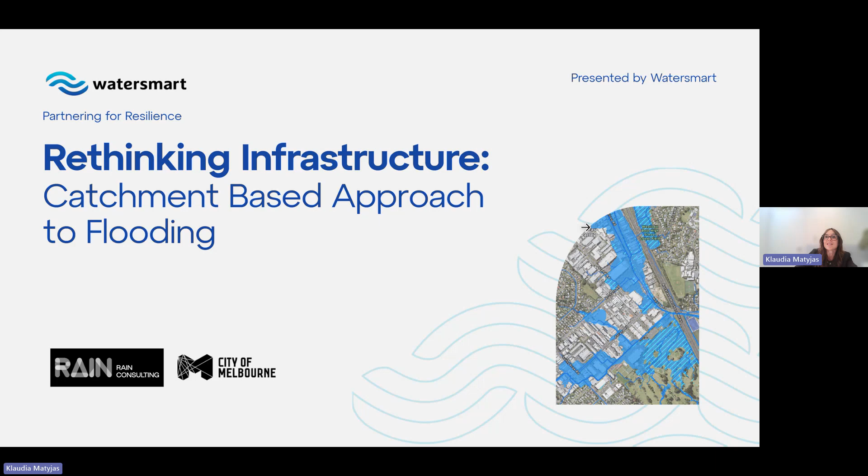Considering that you're here today, I suspect most of you know a little bit about Watersmart. I'll do a really brief introduction about who we are and what drives us. Our mission is simple: we want to optimize our water footprint on this earth. We do this by helping communities manage, treat, measure, and protect their water systems, creating healthier, safer, and more sustainable environments.

Among other systems, Watersmart delivers tailored stormwater management and flood protection strategies here in Aotearoa, New Zealand.

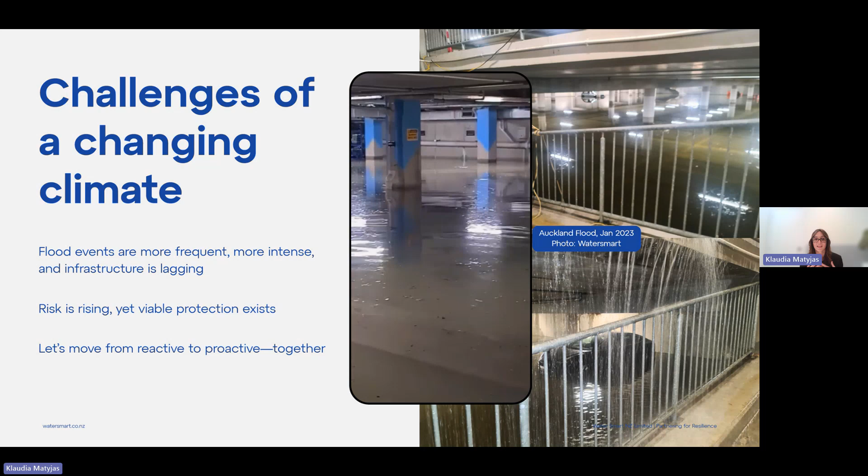Floods are no longer a rare event. They're more frequent, more intense, and increasingly destructive. It's clear that our infrastructure here in New Zealand wasn't built for this reality, but that doesn't mean we cannot adapt and change something.

The irony of a 1 in 100-year flood is that it's much more frequent now than 1 in 100 years. I think in my 6 years living in Auckland, I must have experienced at least 2 of those events. So that tells you a lot.

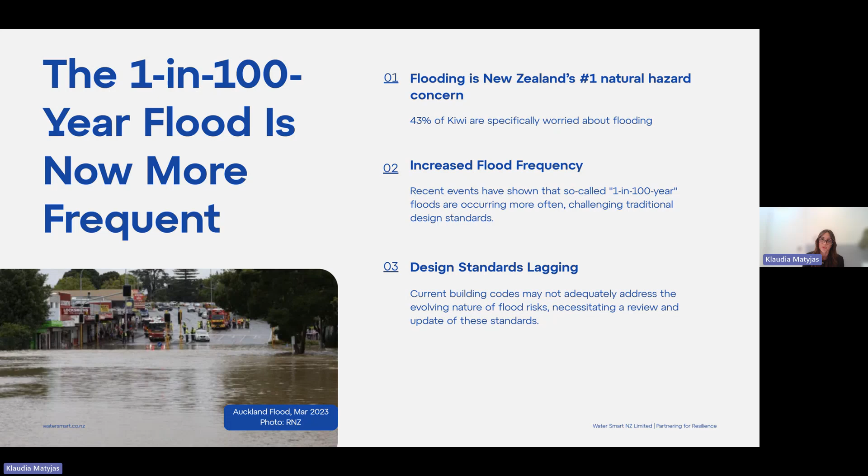Flooding is actually a major concern to New Zealanders, with 43% of us specifically worried about flooding. Our design standards are lagging, and they're in need of urgent review to reduce the risk to lives, to property, and to our communities. But fortunately, there is also a big economic benefit to that.

Research shows that every $1 invested in flood risk reduction can save us up to $4 in future response costs. And that's the conservative figure, because in some cases, this number is as high as $12 to $1 invested. So it's a real incentive to act sooner rather than later.

So what are the infrastructure implications? Our aging systems are clearly struggling, and we're already doing a lot in the sector. Councils face a lot of work, however also long-term lead times on some of these major upgrades, like the Wairau Road catchment here in Auckland. We need some solutions that bridge that gap.

So temporary, more private protection today that complements the more longer-term catchment-wide approach for resilience tomorrow.

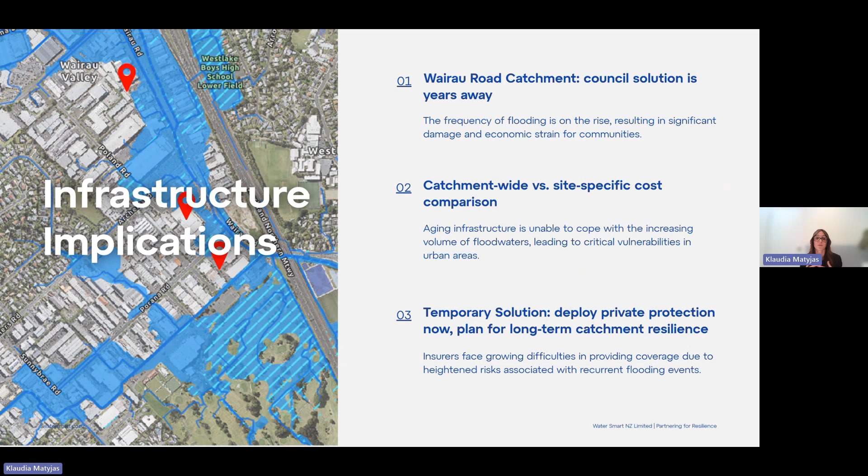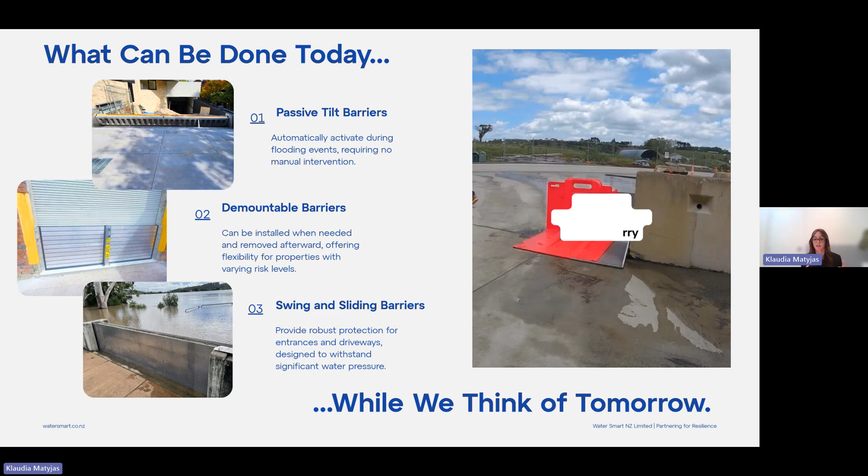At Watersmart, we can help with both. My colleagues today help councils and private asset owners by implementing a range of flood barrier solutions into their flood protection plans for now. If this is something you need in an interim, you can get in touch with us today and we'll be more than happy to help.

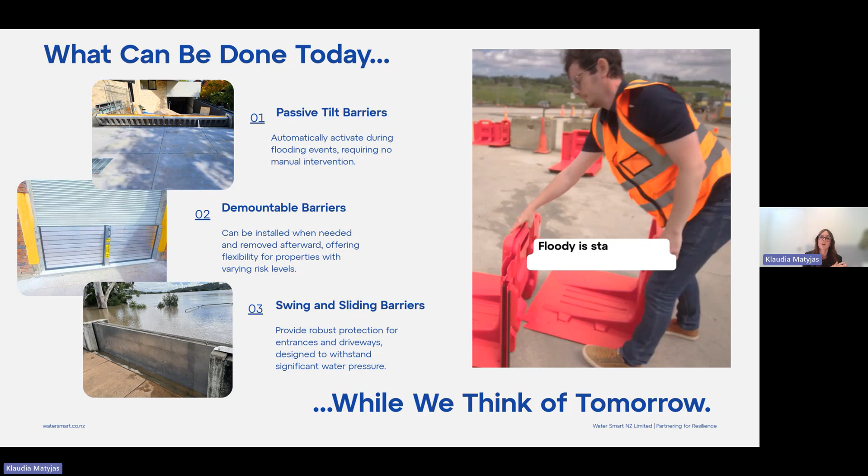But on the other side of the business, we are working with civil engineering experts on implementing the bigger picture solutions. And today we'll be discussing these strategies of longer term resilience and the catchment-based approach to flooding.

So without further ado, I'd like to introduce our guest speakers today. They'll present a real-world case study and their findings on the subject of catchment-based approach to flooding, from across the Tasman from the city of Melbourne. From the city of Melbourne, we have Dr. Cintia Dotto, who's the water-sensitive city lead. Cintia has 15 years experience in the sector and is interested in innovative solutions for climate-resilient cities.

And from Rain Consulting, we have Luke Cunningham. He's the director and the principal engineer. Rain Consulting have been awarded the 2024 Stormwater Australia Award for creating a series of training courses for Australian councils on how they can improve stormwater management across major urban centres. Luke's actually joined our call today from Perth, so thank you for your commitment to joining at such an early hour of the morning.

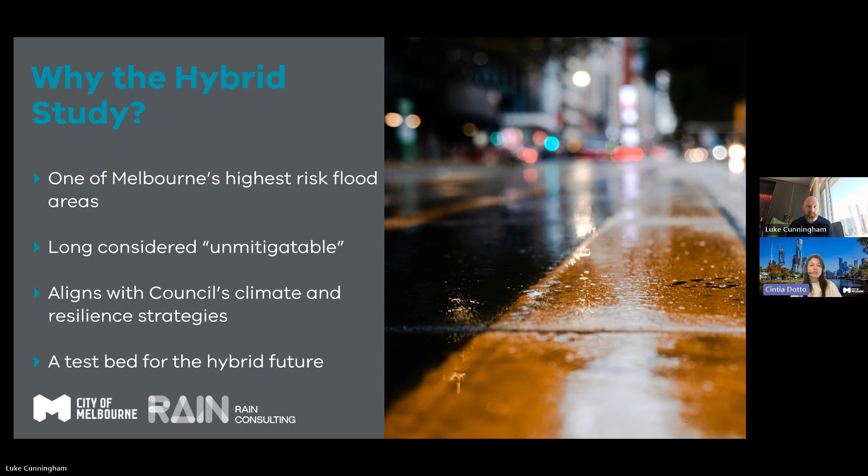This obviously aligns with our city's climate strategies and integrated water management plan. We really see that we have a role to play in how we better manage urban catchments, and this work fits with our vision. It's also been a great opportunity to test our thinking - that a hybrid solution, a mix of traditional infrastructure, nature-based solutions, and increased permeability, can help reduce flood risk in urban areas. This is specifically what we did for this catchment, and we're now looking to expand the principles to other catchments.

A little bit of context on the City of Melbourne and where the Elizabeth Street catchment sits: the City of Melbourne has about 200,000 residents, but almost 1 million people come and pass through the city every day, for work, tourism, cultural activities, and many other reasons.

So it is a very busy city. And the Elizabeth Street catchment, if Luke points to the main drain where it is, that's really one of the key urban spines of the city, where you find a lot of commercial and people activities. This is basically the CBD where everything happens.

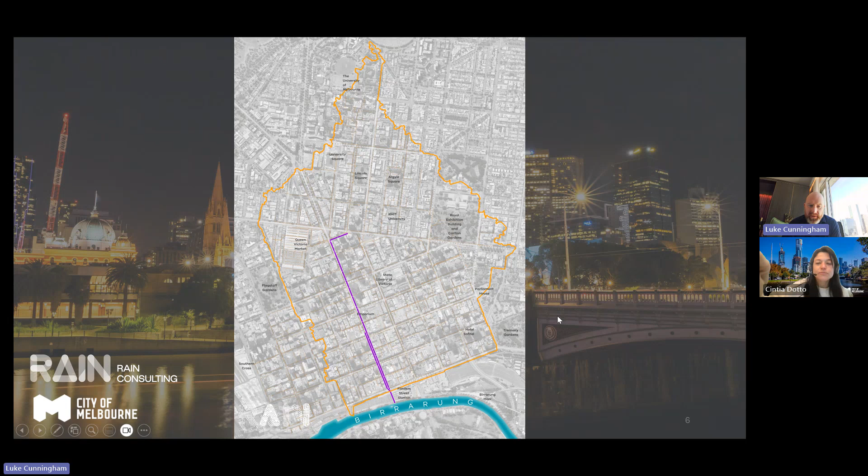I'm going to go into a little bit more detail about what this study entailed and how we looked at it. We call it the catchment-based approach to dealing with flooding. It sounds like a fancy name, but what we're talking about is it's truly a catchment-based approach. So when we've got an issue, say on Elizabeth Street, which is this main spine here, sometimes as flood modelers or flood practitioners, we're tempted to just go straight into the area of issue and try to solve it there. And a lot of the time that can be a big pipe running down the road, or a storage or something like that.

In this case, as Cintia mentioned, it's a heavily constrained catchment. We've got lots and lots of services underground. We've already got two big pipes running down Elizabeth Street, things like that. So what we've called this is the catchment-based approach, to really understand how the catchment works, what the timings are throughout the catchment, and whether we can impact that in a different way, rather than trying to solve the issues on Elizabeth Street and other high-risk areas by doing works elsewhere in the catchment.

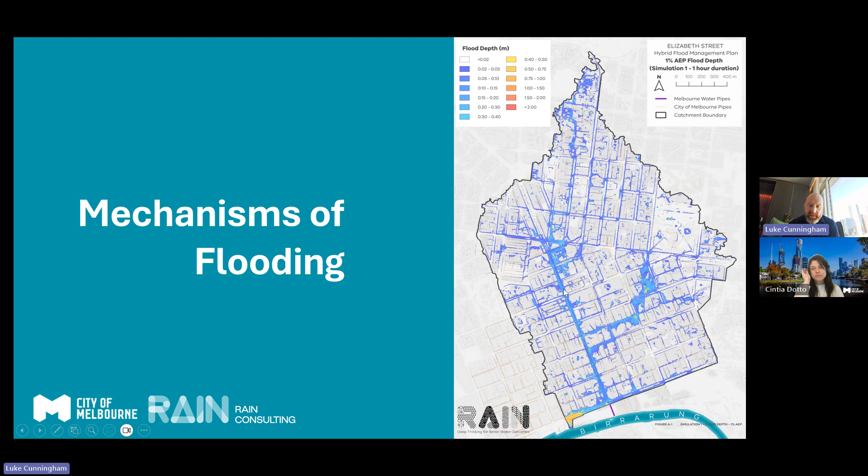What really gets us in this catchment is the velocity of the water running through the streets. So quick little bit of history.

It was described, when talking about Williams Creek, as a jungly chasm, an irregular broken up ravine through which the winter flood waters thundered over shattered tree trunks, dispersed rocks, roots and nuts. That's in 1888, before we'd really developed the catchment to the level it is today, and it was already talking about a very, very wild catchment.

What they did around that time was they covered Elizabeth Street right up, covered the creek up, and built two big brick barrel oval drains running down Elizabeth Street. And this Edmund person, back in 1888, said Melbourne missed a great chance in filling up a street this troublesome - referring to that we could have left it open as a waterway at the time and helped deal with the problem.

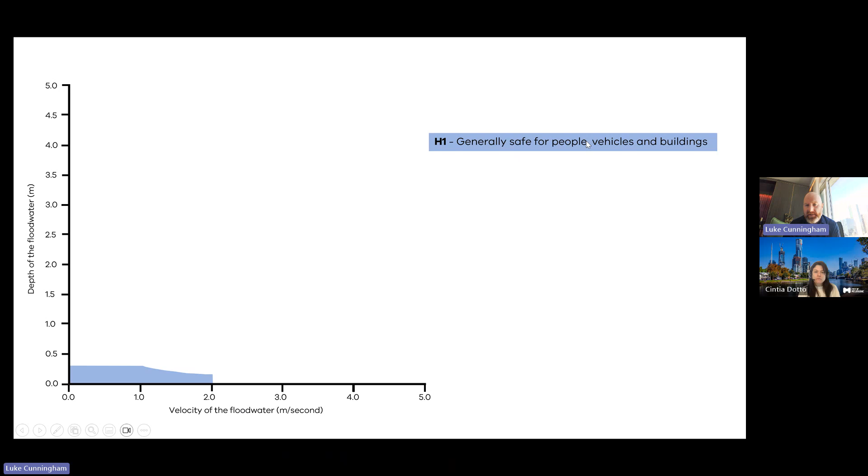H1 is generally safe for people, vehicles and buildings. You can see as it builds up, when we're in this yellow category, we're looking at unsafe for vehicles and people. Buildings are vulnerable to structural damage, so we might start damaging buildings, and older, less robust buildings might actually fail completely. We're talking about velocities up to 4 meters a second there, depths up to 4 meters.

We said that on that 1972 event we had 6.2 meters a second, so we're off the scales on the national hazard categories here. Unsafe for vehicles and people, all building types considered vulnerable to failure. So this is what defines this risk in Melbourne.

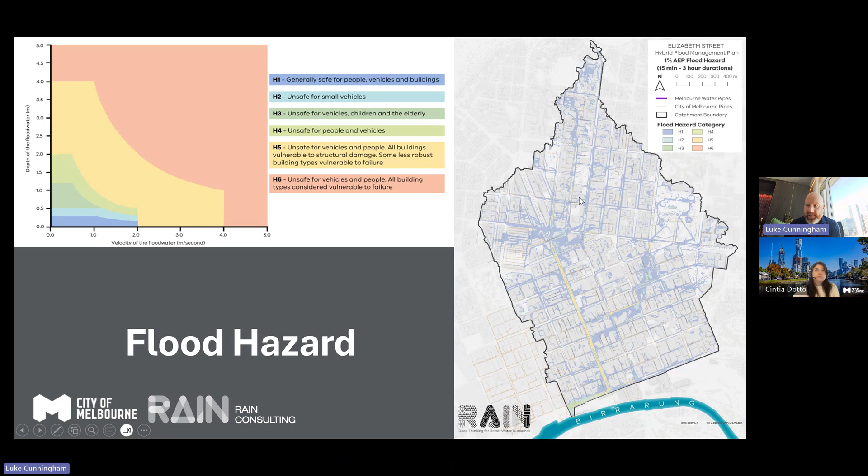I'll go back a slide there, if I can work that out. Okay, so we're going to have a quick look at the velocities, the hazards across the catchment. This again is the 100-year event, and you can see the hazard categories coloured the same on the map as they are on the chart. We'll do a bit of zooming in.

So this is off to the east side of the catchment. We've got the Carlton Gardens up the top here and the Melbourne Museum. As soon as it leaves there, we've got some H5 hazard immediately rolling through as the water makes its way, wobbling through these streets, through buildings, particularly through here. We've got this very, very nice big area of H5 hazard.

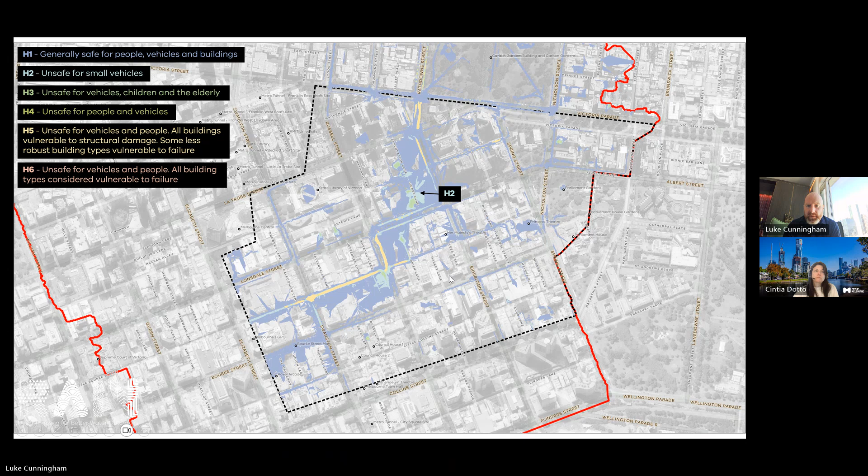This is our Chinatown area of Melbourne. Very, very busy area, very confined streets, very old buildings as well. So when we're talking about old buildings, we can also be thinking about the potential for failure there. Just pointing out some of the hazard categories there.

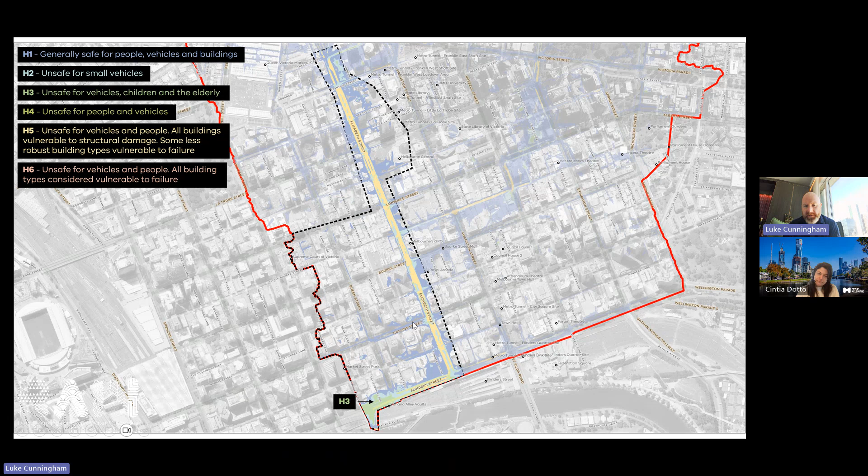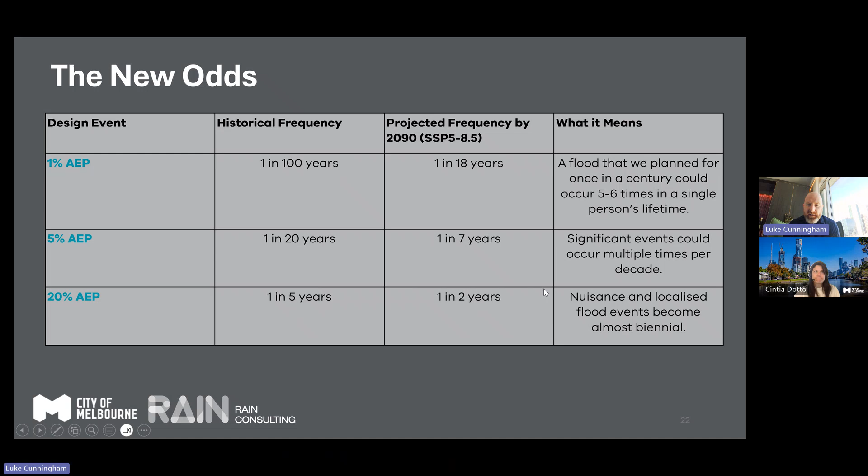Not only do we have this existing flood history, we've now got further development in the catchment, and we've also got climate change coming for us. So what was our 1 in 100 year event - as Claudia mentioned earlier, she's seen a couple in 6 years - with our climate projections, we're looking at a 1 in 18 year storm. So if you plan to see one in your lifetime, you're probably going to see 5 or 6 with the new odds. And these more frequent events are going to become even more frequent.

In the upper catchment, flood storage is a good idea - that's where you capture it and release it slowly. Stormwater reuse is a great idea too - we catch it but don't let it go, we reuse it later. Hard surface reduction, of course, and treating the hazard locally, so that's just localized solutions.

We'll go into that a little bit further.

But catchment wide, we've also got policy levers we can use, and some flood education and resilience and flood warning systems. So what did we do?

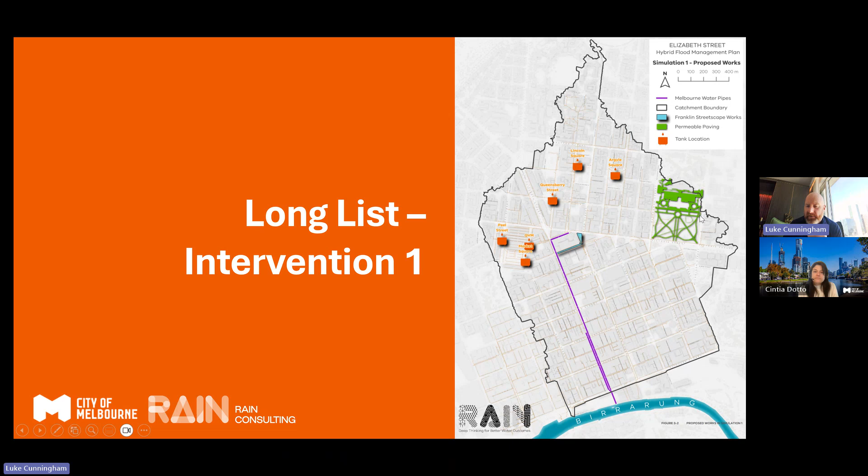We came up with 3 lists of different mitigation solutions we could look at. This wasn't just arbitrary, there was a lot of background that went into this. The first one is looking at some big storage tanks in the upper catchment, some streetscape works in the blue, and some permeable paving around the Carlton Gardens and the Melbourne Museum. I'll go a bit more into that permeable paving in a minute.

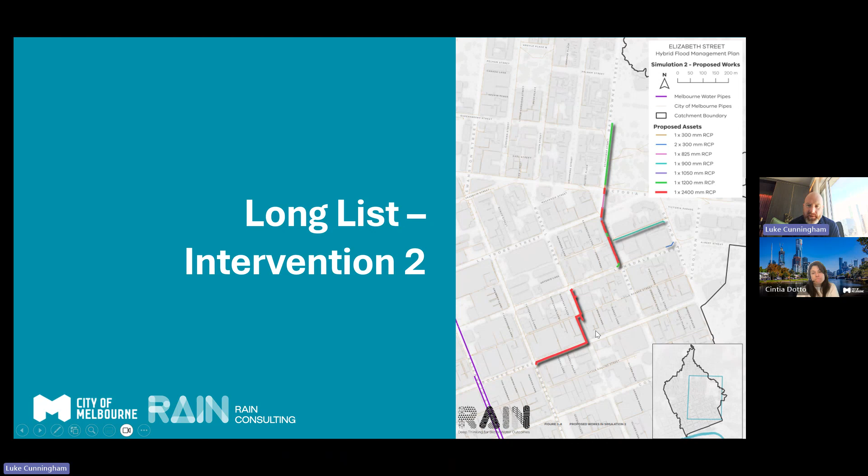Number 2 was a really traditional engineering approach where we put in big pipes, essentially. Particularly this one here, Russell Street and Bourke Street, our main shopping precinct. We designed this, it worked quite well. It was a 2.4 metre diameter pipe, but it would be incredibly disruptive to build something like this. We'd have to completely rip up both of these roads, probably a couple of years to construct, incredibly disruptive to the city, put a big pipe in, bury it underground, and hope for the best next time it rains. Number 3 was bike lanes considered for permeable paving.

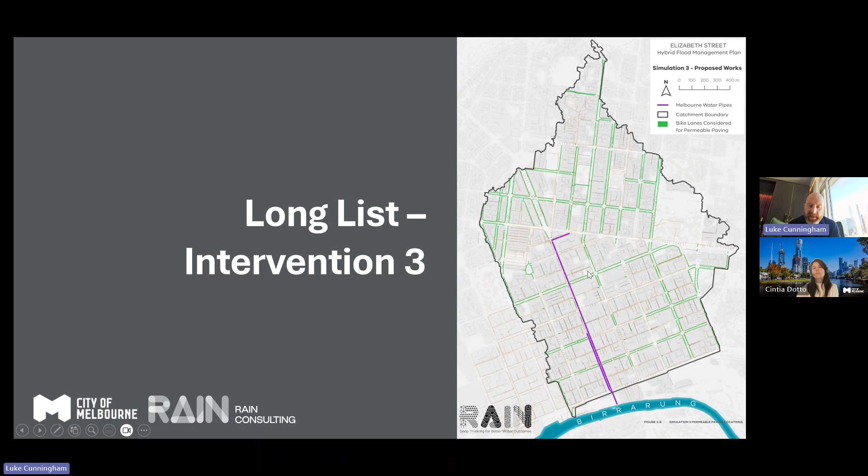That's where the porous lane type product came in. On this map, in the green, these are all the bike lanes we considered for permeable paving. The more and more we use our bike lanes, or redo them, we keep them separate from traffic, which is a great benefit for the porous lane products, or any porous paving product, because we want to keep big vehicle movements off them. We saw that as a really nice opportunity.

So this is our solution at the moment, or how we've modelled it. You've got your bike lane on top, and our permeable layer in the dotted colour. Instead of relying on infiltration to the groundwater, because we've got a lot of rock in the city and contaminated soils, what we did is put a 400mm high box culvert for the width of the bike lane. That creates storage, so once that storage is full, the bike lane just cannot absorb any more. We've also connected it to the council's stormwater network, so it almost works like a little retarding basin everywhere.

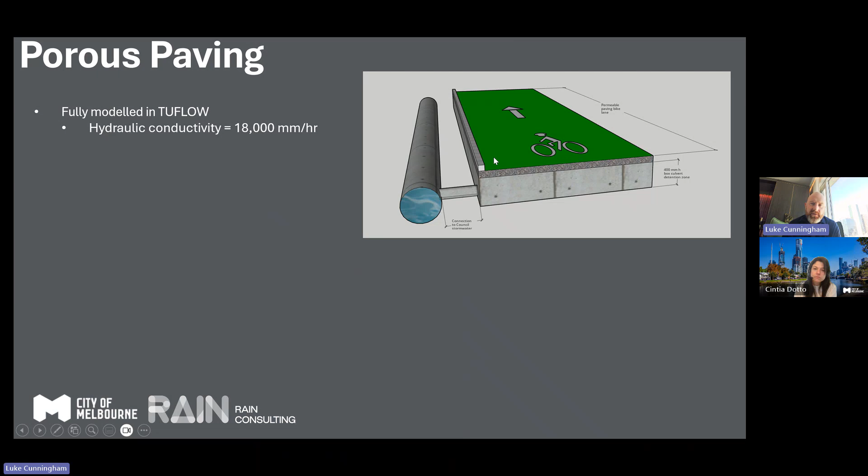We've fully modelled this in TUFLOW, the flood model we're using. As far as we're aware, we're not aware of anyone doing permeable paving in a flood model to this degree over this size of catchment before, so we're quite proud of this work. These are some of the parameters given to us by Porous Lane, and we'll note this one here, the 18,000mm an hour infiltration rate, or hydraulic conductivity.

So what we did was model it with that 18,000 an hour, which is quite a lot of infiltration. One of the negative points about porous paving is that they can block and need a lot of maintenance. So we modelled it with 180 millimetres an hour, 1% of its capacity, and also at 39.2, somewhere between our 100-year and 50-year event. What we found was the results were actually unaffected by the infiltration rate until the rate dropped below that storm's intensity. When we modelled the 180 millimetre an hour, our 100-year rainfall intensity for the 1 hour events was somewhere around 70 millimetres an hour, so it was more than enough to still cater for that, which was a nice conclusion, that the maintenance wasn't such a big issue.

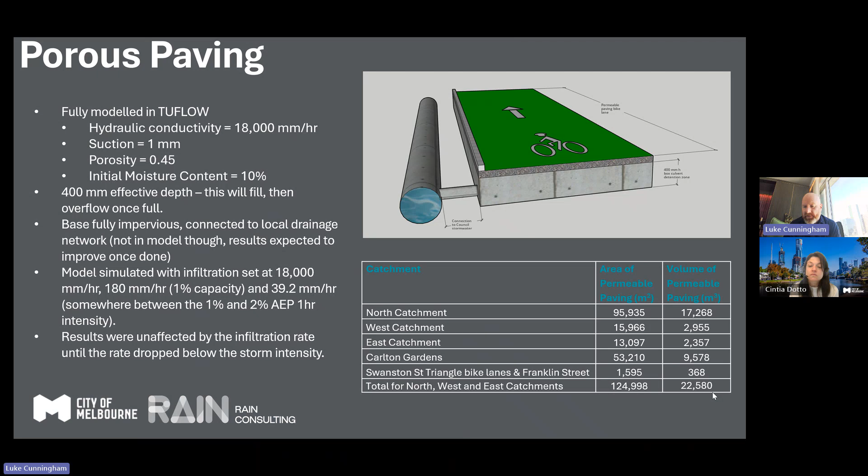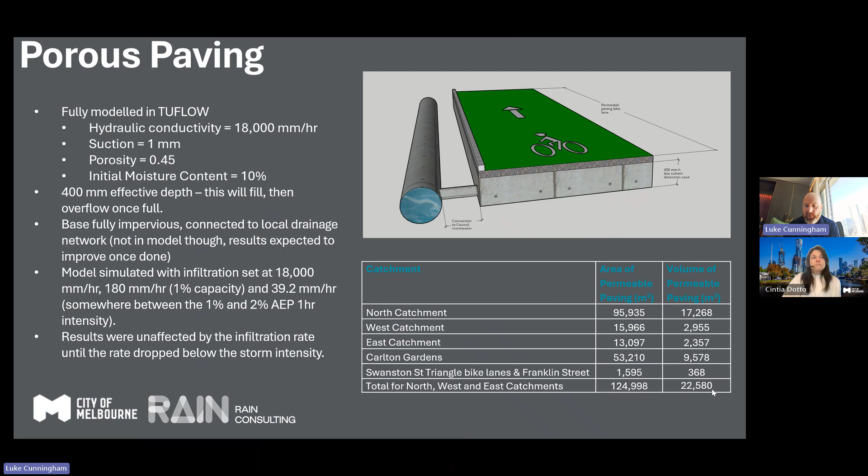On this particular one, this is what we put in, our area of permeable paving. We had just under 125,000 metres squared of bike lanes proposed to change over in the model, and that translated to 22,000 cubic metres of storage when looking at these box culverts. That's a lot of storage for us in the CBD, because it's very hard to get big storages. If you're in a more urban or rural area with parks and sporting fields, you can get a lot more storage than this, but this is also distributed across the entire catchment.

So what did we see in what we call the 1% AEP event, or the 1 in 100-year event?

We saw reductions in depths everywhere across the catchment. Here's a nice little image of what bike lanes in Melbourne look like, generally separated from the traffic lanes with some bollards or something like that.

We saw around a 5 to 15% reduction in depth, and upstream at the top end of Elizabeth Street, around a 15% reduction in depth, and downstream about 20%. Right down the bottom where it sort of ponds and waits to get out to the Yarra, we had about a 30% reduction.

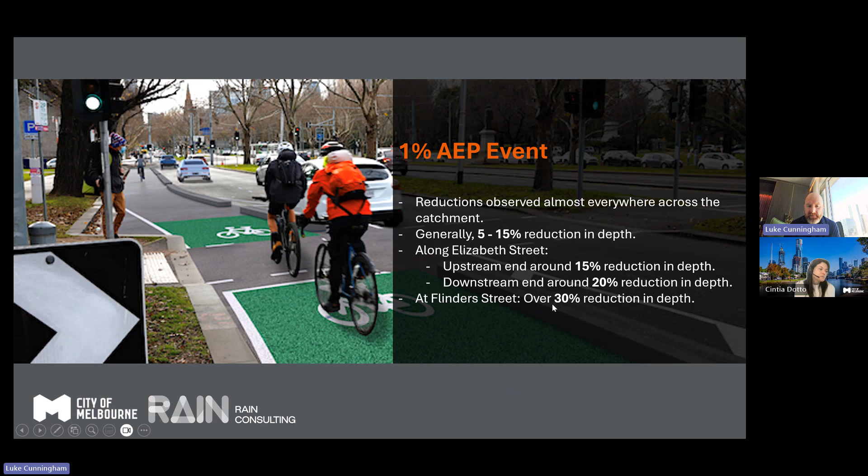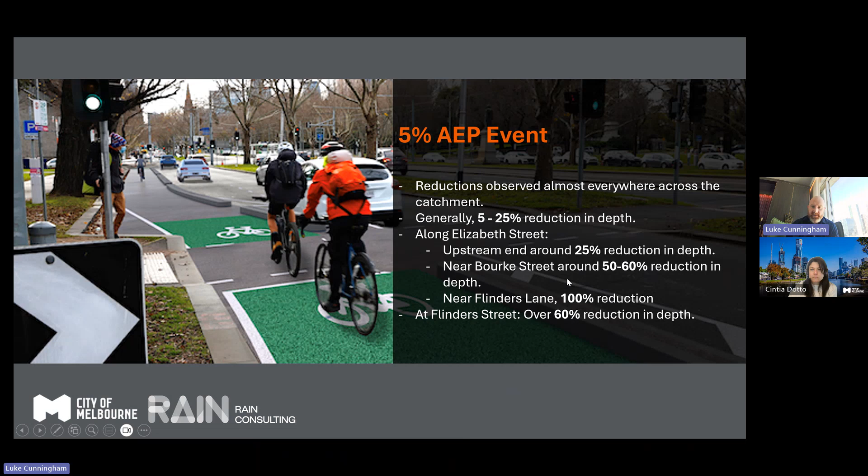In the 1 in 20-year event, or the 5%, again we saw reductions everywhere between 5 and 25%. Upstream, around 25%, but when we got down to near Bourke Street, that very busy area where most of those photos of the tumbling water down the street were, we see about a 50 to 60% reduction in depth. Near Flinders Lane, just a little bit further, not quite when it gets to Flinders Street, we saw complete drying of the catchment in that event, and over 60% when it's on Flinders Street.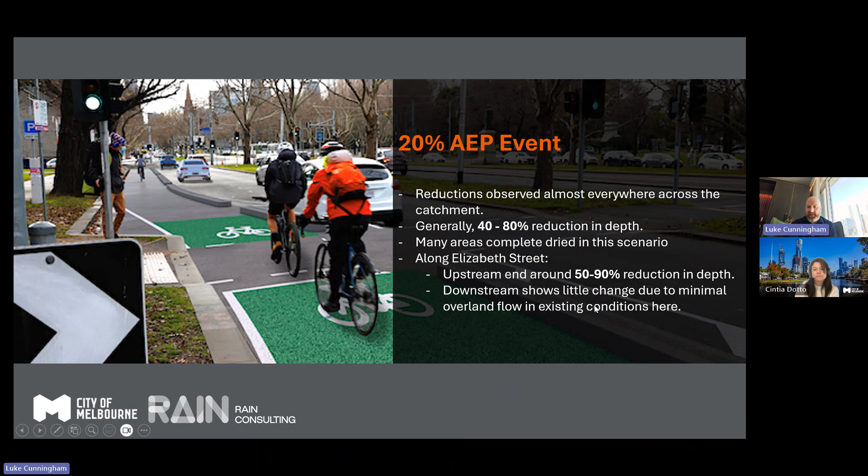So interestingly, the hazard reduction is a really nice one to talk about. Hazard reductions are common along the main flow paths. Reductions in these very high hazard areas along Elizabeth Street and the eastern CBD, that Chinatown area I showed you, were between 2 and 4 hazard categories. We actually saw large areas of H5, that's unsafe for vehicles, people and all buildings, reduced to H1, which is generally safe for people, vehicles and buildings, and that's in the 1% event.

So that's while we're talking about reductions in flood depth. That's great, but what we're really caring about here is these reductions in hazards. That's what matters to public safety.

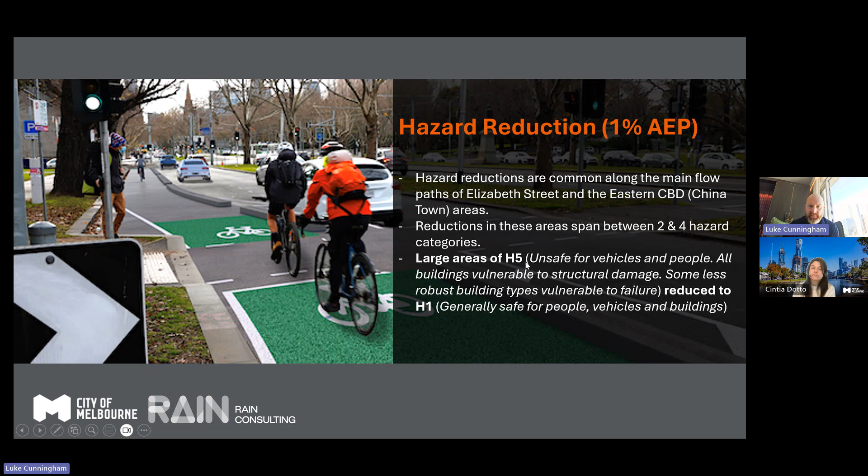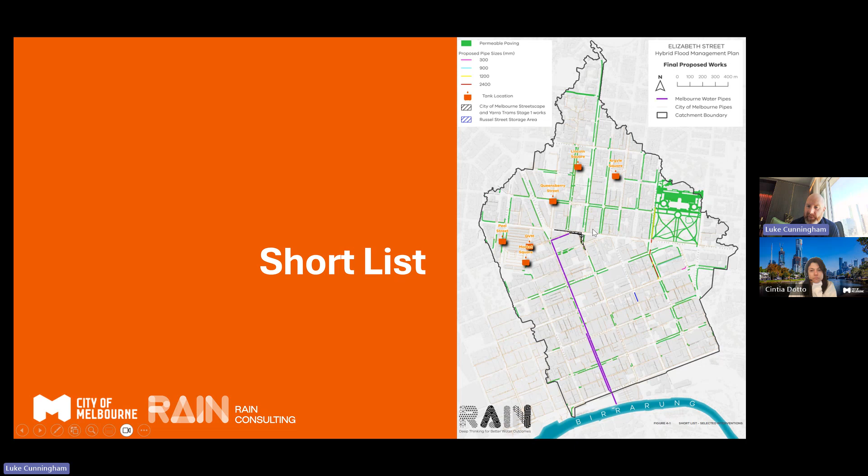Where we went from there was we came up with this short list, which was a combination of all the ideas. We've got those tanks, we've got a few of those pipes but not the big disruptive one, some streetscape works up here, and then the remaining green is where we put the permeable paving. How did we decide where to put that permeable paving? The model actually tells us how well those areas perform, how much infiltrates in those areas, so we targeted the best performing areas there.

So in this one, we've got some flood depth reductions. I'll quickly zoom in - this is the 1%... I think it's the 1%, sorry, no, 20%, so the 1 in 5 year. We've got some pretty big reductions, almost 95 to 100% through here, and up the top end of Elizabeth Street, some very, very big reductions as well.

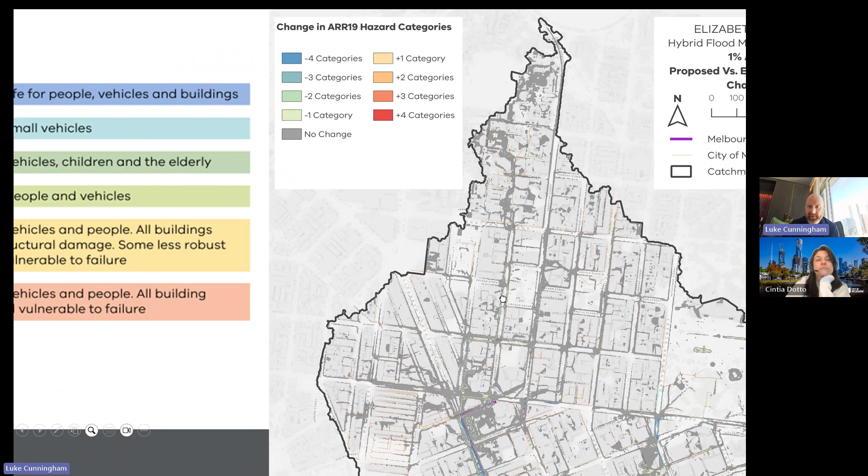That's in flood depth. And then when we look at hazard, this is the 1% event, the 100-year event, we can see some big reductions. These are just changes in hazard categories. Blues and dark greens are -4 or -3 categories, so if we're going from H5 to H1 that would be -4 categories. We can see some really nice spots through there - it's a bit hard to see, but spottiness all up Elizabeth Street of between 4 and 3 category hazard drops. So some very impressive results there.

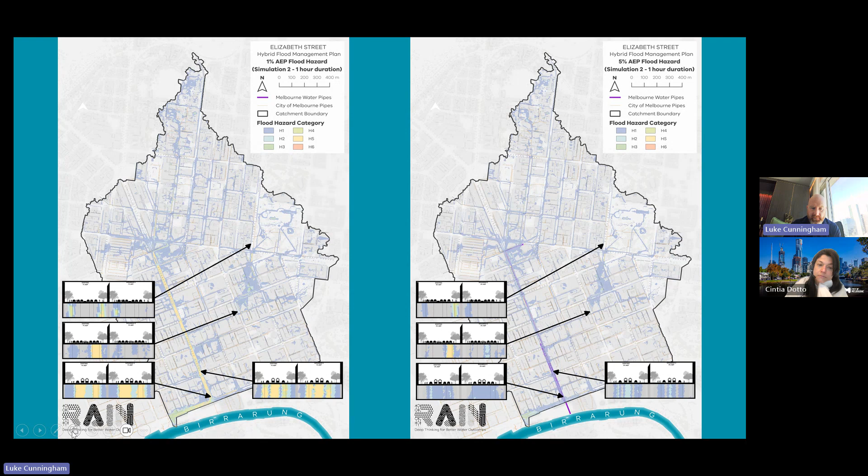I might quickly skip past this one, but this is just another way that we're showing these reductions in hazard, a cross-section view. I'll quickly show one at random, maybe this one over here. We can see in existing conditions, we've got some quite high hazardous flows down the car lane and pedestrian area. In the mitigated solution, we're able to remove all that - our most vulnerable road users, the pedestrians, are completely free of flooding now, things like that.

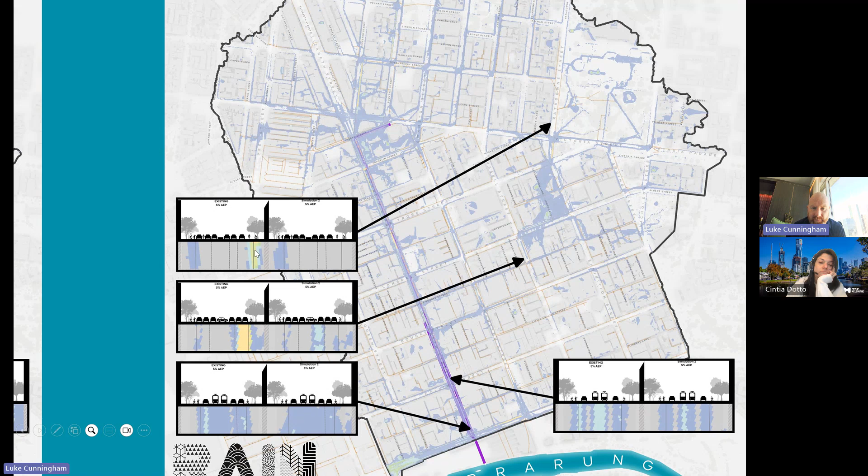So some more innovative ways of showing these reductions. Another good one here, we've got some high hazard in the bike lane and the pedestrian area, completely removed in the mitigation scenario.

So when we looked at that big pipe option that I said would be very disruptive, you might close the streets down for a couple of years there. You need a lot of funding for those couple of years to do that, a lot of planning to get to that point. When we're looking at these bike lanes and putting storages in and things like that, it can be very much a staged and opportunistic approach.

We're resheeting that road at the moment. Okay, let's have some standard drawings for what these permeable bike lanes are going to look like. Make sure they get included. Okay, we've just gained a couple of thousand cubic meters of storage by doing that. And then the next project happens. So as these bike lanes and roads get repaired, you can imagine in a CBD environment there's just constant roadworks going on of implementing upgrades and big major projects coming through.

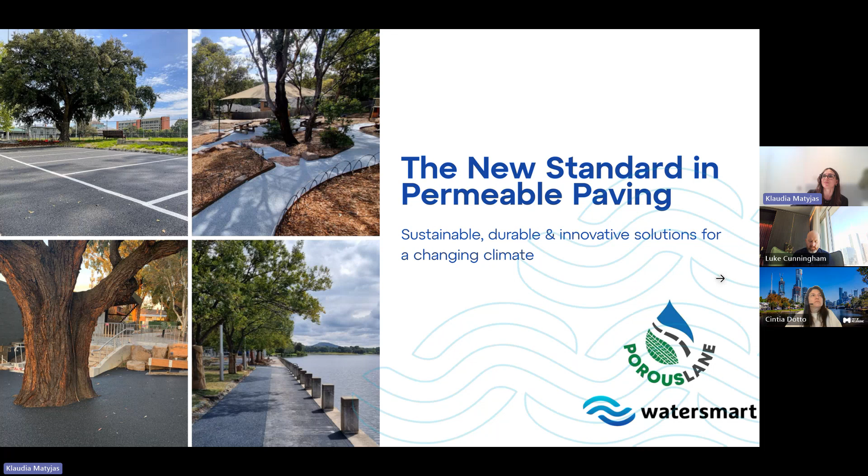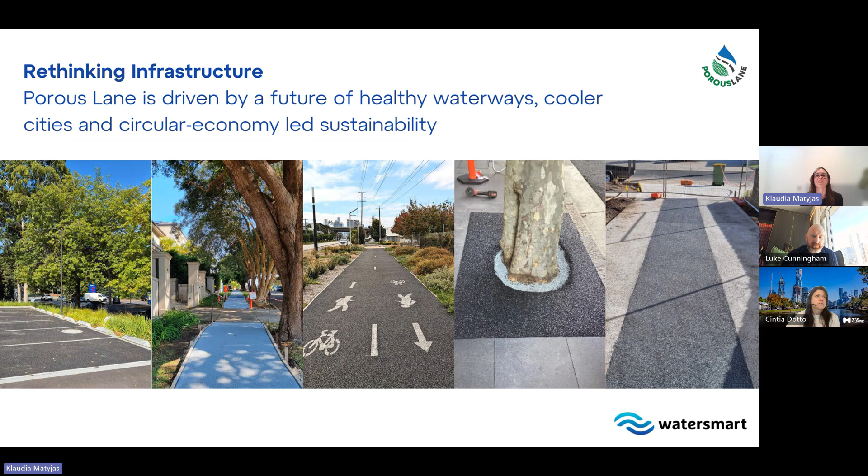We've already talked about how water is overwhelming our systems, and further to Luke's point, we can sort of imagine what if every car park and cycleway and driveway and pavement wasn't part of the problem, but it was actually part of the solution. And that's exactly what we're trying to do with porous lane.

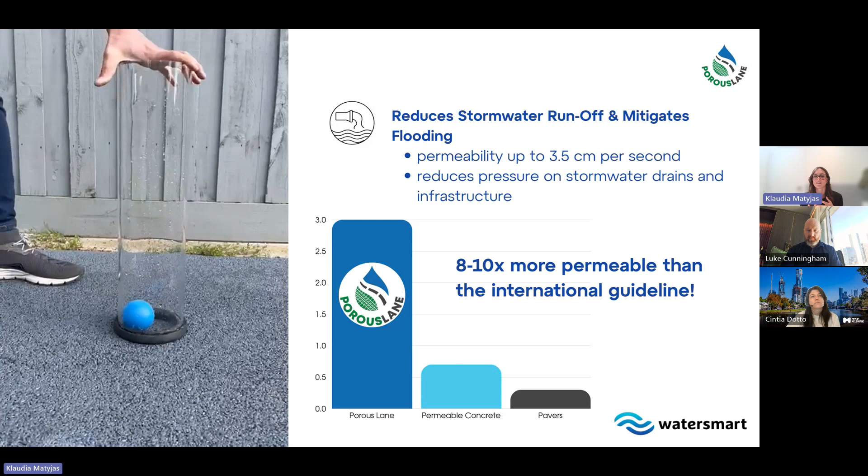About the pavement, given the title of the webinar, obviously it's designed to mitigate flooding risk and reduce stormwater runoff. The porous lane is quite special because with permeability of up to 3.5 centimeters per second, it stands at about 8 to 10 times more permeable than the international guideline.

A very unique feature as well, researched at the University of Melbourne, is that the pavement removes urban pollutants and increases water quality as the water goes through. The team demonstrated up to 95% decrease in nitrates, up to 90% decrease in heavy metals, and over 65% reduction in total suspended solids in real world field conditions. So quite a unique property here.

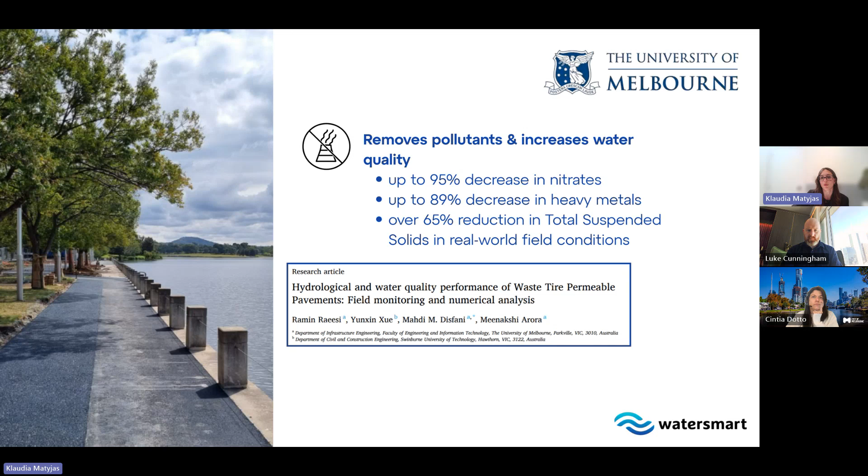Because of that, we can also explore stormwater harvesting and stormwater reuse on sites. We've had sites where the pavement had water going through connected to stormwater tanks and further use for irrigation across the site. So a lot of different interesting ways to engineer it into your projects.

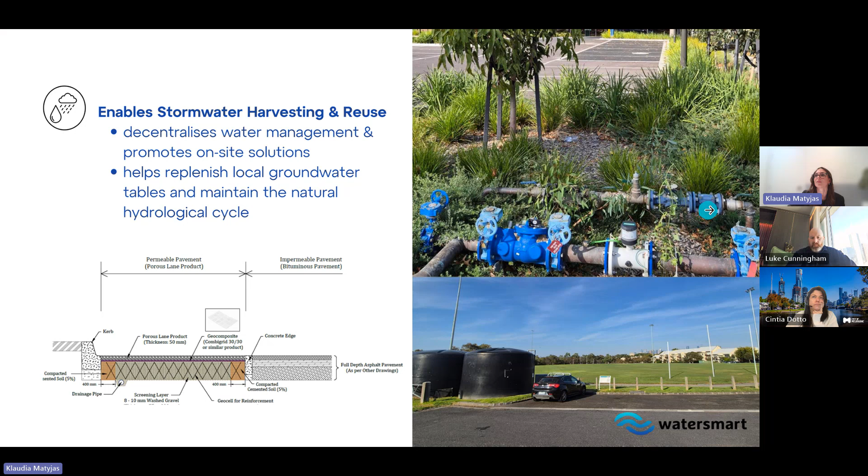A common question and a common conversation I have with council members is about rain gardens, because obviously they serve their purpose. However, they're often a common pain point because of the maintenance issues associated with it. Porous lane, because of that high permeability and the catchment built into the pavement, can replace them in some cases and act as a dual surface.

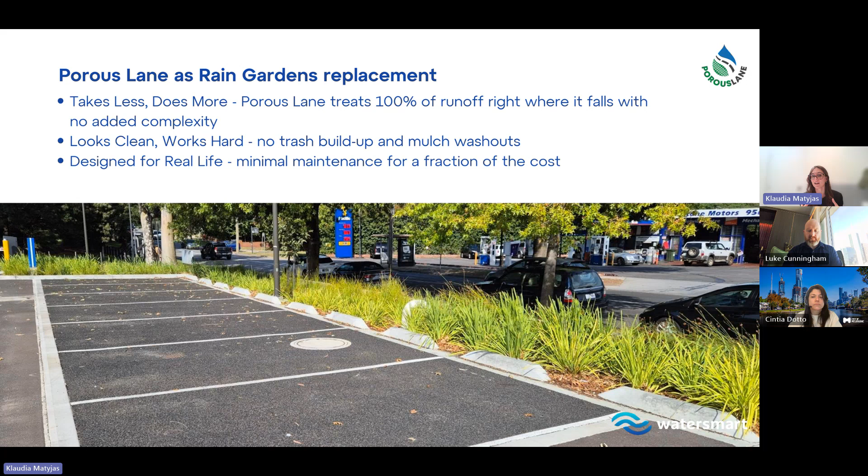So as a rain garden and as a car parking bay, for example, and there's no trash buildup, no mulch washouts associated with those rain gardens. It's something you can integrate into your project if short for space, for example.

For our faster growing cities, a really compelling argument behind porous lane is that it reduces the urban heat island by about 3 to 4 degrees. Because of its high porosity of about 40 to 50%, moisture gets trapped in the pavement. As it evaporates, it cools the surface surrounding the pavement, creating much more livable, healthier cities all around.

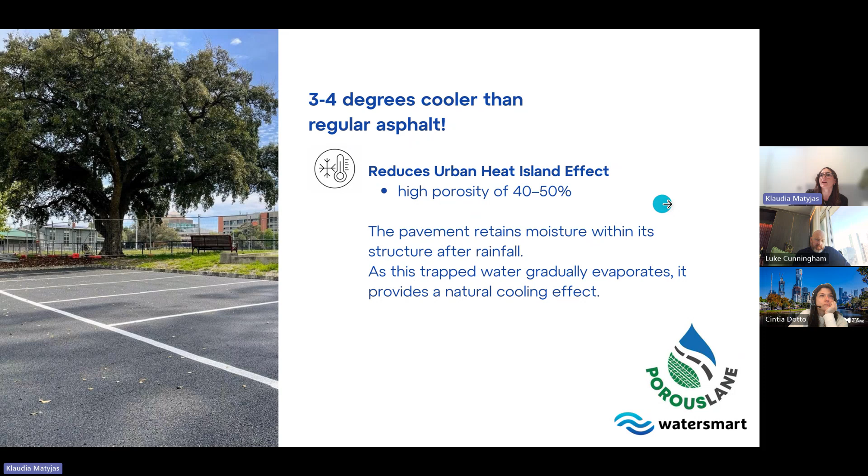And thanks to its high permeability, it allows water to go through the pavement, nourish the root system around existing trees, and help them grow faster. So it actually enables much faster urban canopy growth.

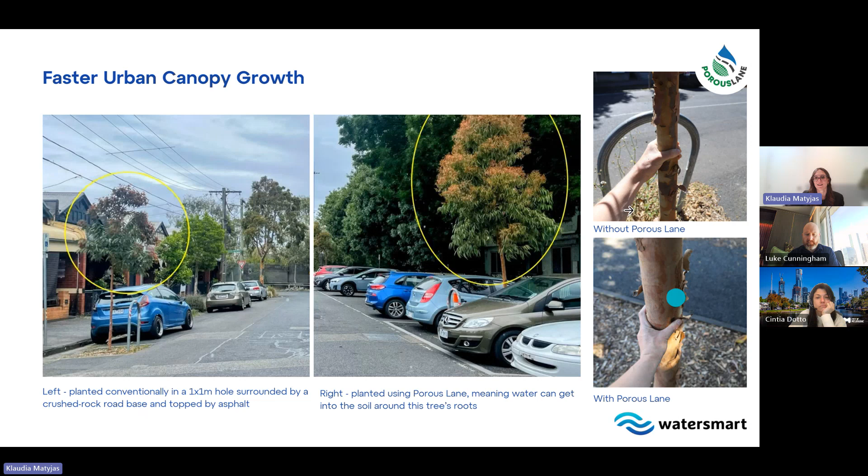There's a really cool case study from the city of Melbourne where we planted 2 same-sized trees at the same time. The one on the left was planted using traditional methods, asphalt all around a 1 by 1 square of soil, with the one on the right using Porous Lane paving in the surrounding areas, with more water and more nutrients going through. The tree grew much faster, with a very scientific method - I always say, measuring tree trunk growth with our hand. It's quite compelling. So yeah, healthier cities and safer cities as well.

On top of that, this pavement is crack resistant and semi-flexible. So while building around those existing trees, you don't have to worry about root movement and the pavement cracking. I'm sure we've all seen old pavements bending under the pressure from tree roots. Slip and skid resistance achieves the highest P5 rating, exceeding New Zealand Transport Agency standards.

Also for health and safety, quite important - that's why the system is used across some aged care facility settings across Australia, and soon in New Zealand as well. We do have a traffic mix which enables us to build car parking bays and low-duty driveways.

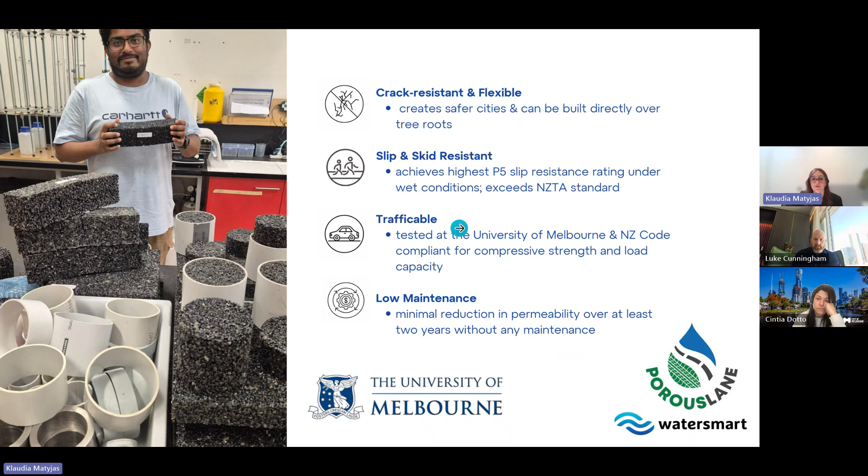And our favorite question again, the maintenance. So further to Luke's point, even if the permeability reduces, the pavement still does its job. But because you're starting from such a high permeability standpoint, even a reduction of 50% with Porous Lane pavement still gives you really high performance and permeability. Plus, research suggests there's minimal reduction in permeability over at least 2 years with no maintenance whatsoever.

And what I like to call our cherry on top - on top of all these benefits with permeability, flood prevention, filtering urban pollutants from the water, and urban heat island reduction, the pavement is made using recycled tire material as its content. In New Zealand, we have about 6.5 million tires ending their useful life every year, with around 4 million ending up in landfills. So finding use for tire-derived aggregate is really important, and that also gives the pavement its flexibility. We're quite proud to partner with Tyrewise to recycle tires locally here in New Zealand.

And lastly, apart from building more flood resilient cities, every Porous Lane pavement supports cleaner waterways, urban greenery, and circular economy principles. If you have a project in mind, feel free to get in touch with me. Again, thank you for joining. We can move on to the Q&A section now.

I'm assuming Porous Lane was used on the cycleways in this project - do you want to answer that, Luke? Sorry, what was the question there? So, Porous Lane was used, was it? I'm assuming porous line was used on the cycleways in this project. So the project was a modeling study, right?

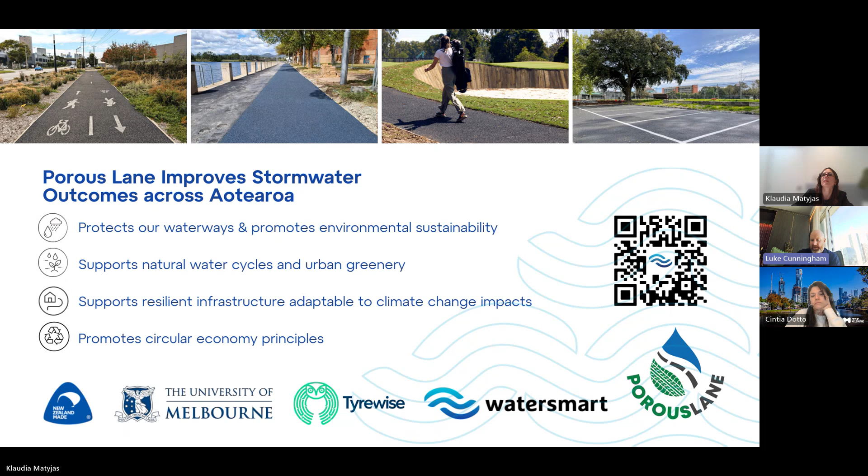Great question, Tom, and that's 100% the reason it worked - changing that timing in the catchment. Where we've got the two branches coming together at Elizabeth Street, that causes the biggest issues there. We were able to change the timing of those two peaks, which gave us some of the biggest benefits in the catchment. So while we only had 22,000 cubic meters of flood storage there from the porous paving, it was more about being able to change that timing and being a little bit strategic around where we placed it.

Awesome, thanks Luke. And I see Daniel's question, which you've already answered in the comments, but as the last one we can elaborate on this. How is the flow retarded within the porous lane solution if it goes through the box culvert straight to the network? Would there be a restricted outlet?

Yeah, that's 100% correct - a restricted outlet is the idea there, so it works like a little detention tank. I added a second comment saying it's worth noting we didn't actually model those connections back to the pipe network. If we did that, we'd expect to see better results again, just because we'd be able to flush some of that early flow through. Back to Tom's question, you could probably play with those a little bit to further tune the timing to a degree. That'd be an interesting study to do one day. It's a big job though, to connect thousands of little pipes up in the flood model, but it'd be a good one to do.